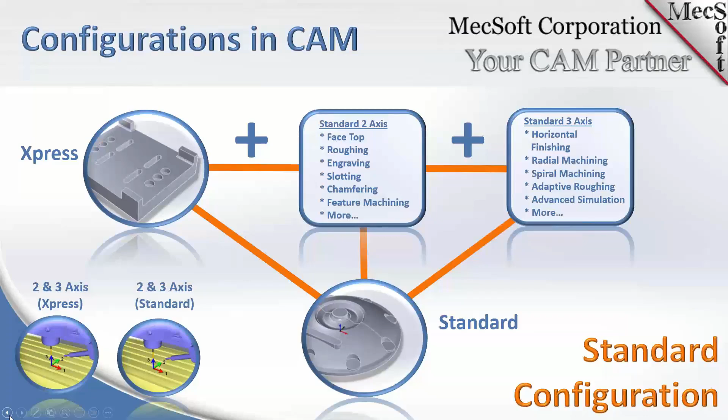So we're moving one up. Other thing I wanted to add was, Don, one other thing I wanted to add was to make sure that if you're just starting out in machining, this might be a good configuration to get. And then once you get your feet wet, you can always step up to the higher configurations. So it's a good starter configuration.

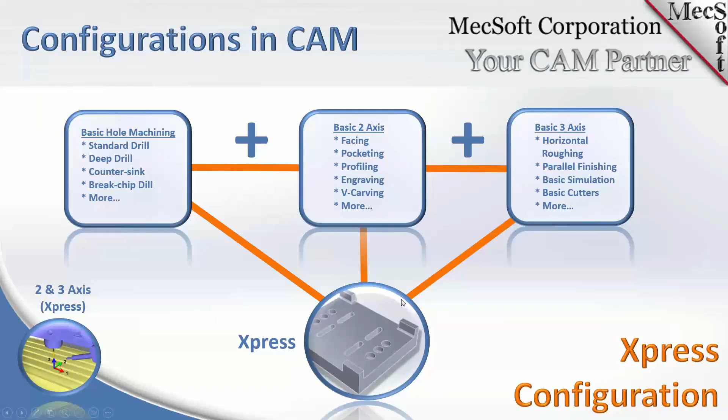Yeah, we provide a really easy migration path if you need some additional features. A good way to get an understanding of whether you do need additional features is to just run the product in demo mode, like we mentioned in the previous slide, and run the next highest configuration than you have. You'll get an understanding of what the additional features are.

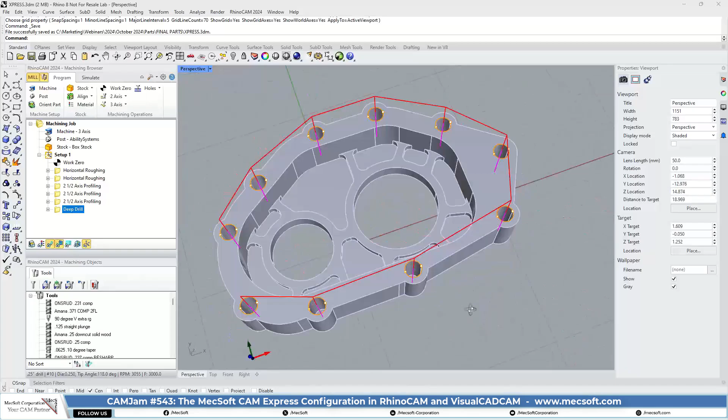So as I mentioned in the presentation, Express is reserved for basic functionality. If you're working with prismatic parts that are basically 2.5 axis parts, here's a good example right here. This part can be machined in our Express configuration. Let me just show you the operation, I'll go through the menus too.

So you get basic horizontal roughing. Okay, so we used horizontal roughing. Let's just go ahead and simulate this real quick. Let's turn that off.

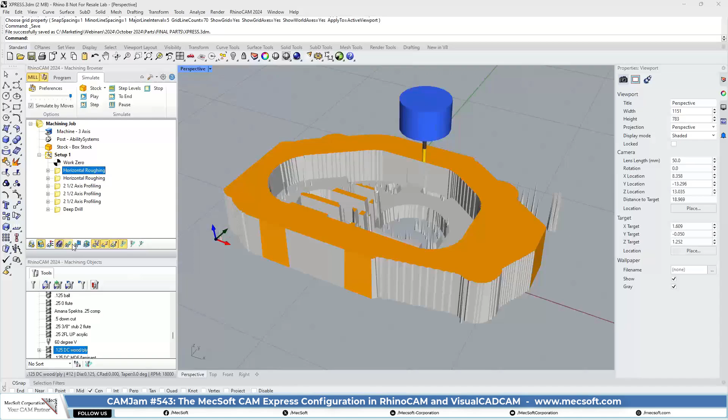So yeah, one of the things I should point out in the Express product is the simulation module you get is only what we call voxel simulation, and that only works for 3-axis type machining. It looks like you have the simulation accuracy set pretty low, so that's why you're seeing all those spikes.

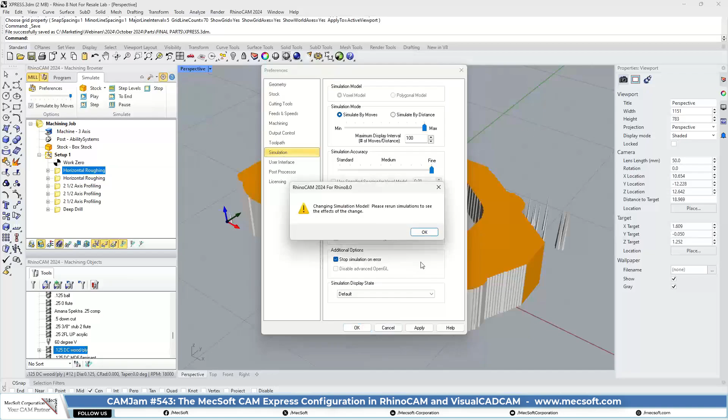Okay, it looks like we still got them.

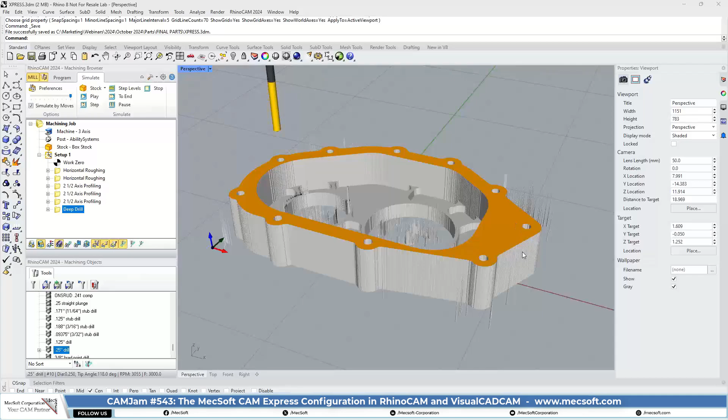As Joe mentioned, the basic simulation model is very basic. It's not highly accurate, but it gives you just an idea of what the part will look like. So let's go through the menus up here.

I'm just going to go into the top menu up here, all the configurations. You have a RhinoCAM 2024 menu, or regardless of the version year, you have the RhinoCAM main menu, which you can run the different modules. So you see here all the different modules.

We have mill, turn, profile nest, G-code editor, mesh, nesting. We didn't really mention the mesh module in the presentation, but if you're machining point cloud meshes, you can use our additional module. Go ahead. Don, we will be discontinuing that module, so let's not talk about that. Okay, I didn't know that.

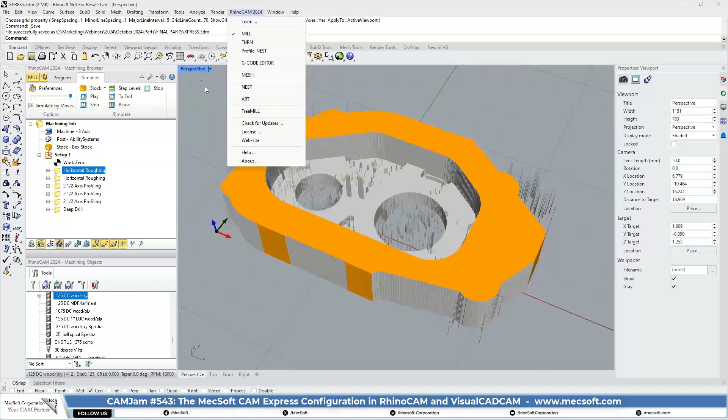Okay, so you got all the different modules you can load from the RhinoCAM main menu. So over here, let's look at the actual machining browser on the left.

So the machine, post, part orientation - if you need to rotate your part to machine in a different direction, you can use the orient part command. You get the basic stock features, a box stock, part box stock, delete - you can also delete your stock and remove your simulations from the stock. And you also get your align functions to align your stock with the part.

This is in all the modules. Also, what's called the set world CS - if you need to move the part in relation to the origin in Rhino, you can use this function here.

And then as far as the machining operation types in Express, obviously you can create a work zero. You have just basic 2-axis operations in Express: facing, pocketing, profiling, engraving, and V-carving. But those four operation types were all we needed to program this part, which is a pretty complex part as far as the prismatic part goes. And you can program this in the Express configuration.

As we mentioned, you only have a couple of basic 3-axis operations: horizontal roughing and parallel finishing. We showed you the roughing, but I didn't have a parallel finishing in here. This is for a contoured part. Again, the part type in Express needs to be very basic contours, like, as I mentioned in the presentation, a thermoform mold core where you're just creating a basic core model, and you can just run a 3-axis parallel finish operation across that entire part. So you got parallel finishing as well as horizontal roughing.

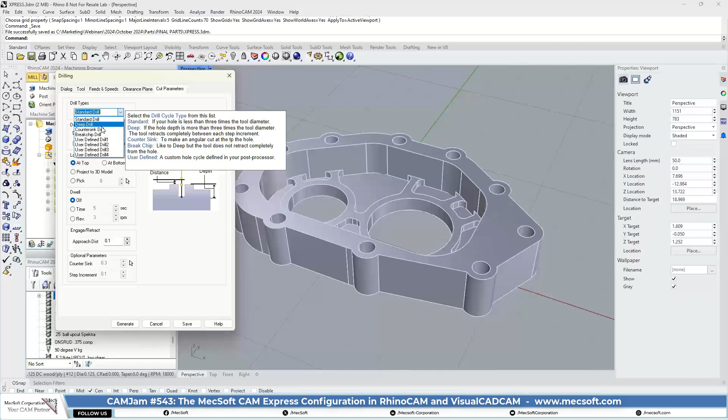So you get basically pretty much all of the hole cutting operation types as far as drilling goes. But you don't get any of the other 2-axis operations - you don't get threading, tapping, and many of the other advanced 2-axis operations. You don't get those as well.

Anything else you want to add to this configuration, Joe? No, I think we're good. Okay, so that, again, to recap, that was Express.